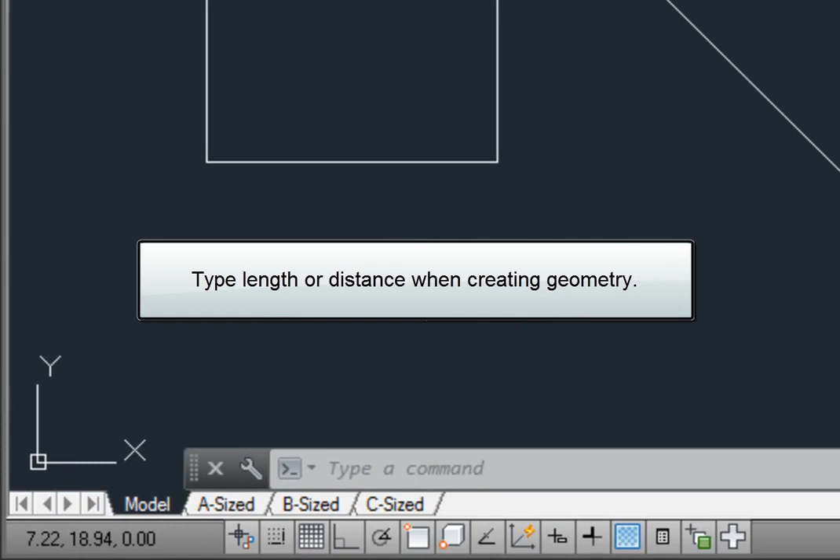Direct distance entry is a simple but powerful technique that enables you to simply type a length or distance when creating geometry. Before proceeding, notice that down here in the status bar, I have all of the various drawing aids turned off. Now I'll start the line command.

I'll move the cursor on the screen, click to specify the starting point for the line, and then move my cursor over to the right. If I know that I want this line segment to be exactly 7 units long, I can simply type the number 7. Notice that it appears here in the command window.

If I press the Enter key and then move the cursor, notice that I've just created a line exactly 7 units long, and the program is ready for me to create another line segment. I'll press Enter to end the command. The problem with the line segment I just created is that while it's 7 units long, I have no idea what angle it was drawn at.

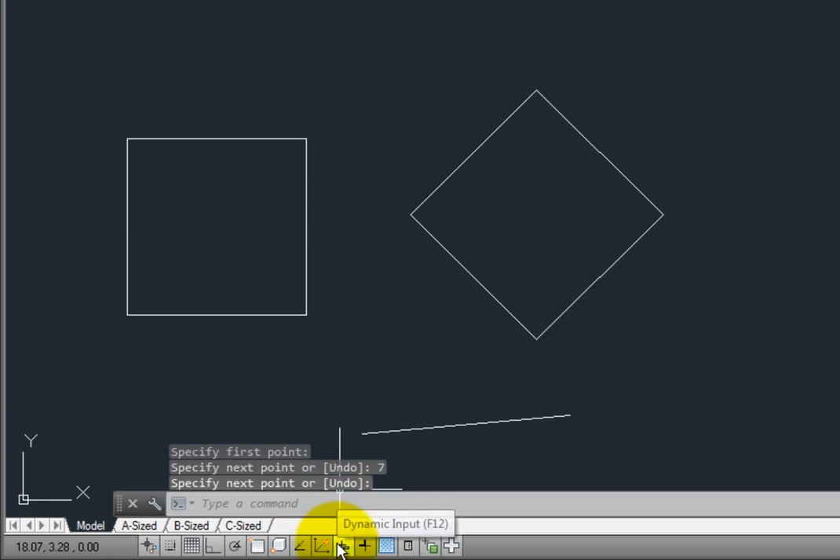So the first thing I'm going to do is to come back down on my status bar and toggle on Dynamic Input. Now with Dynamic Input turned on, let's create another line segment. I'll start the line command. Notice that as soon as I move my cursor into the drawing window, I can see the X and Y

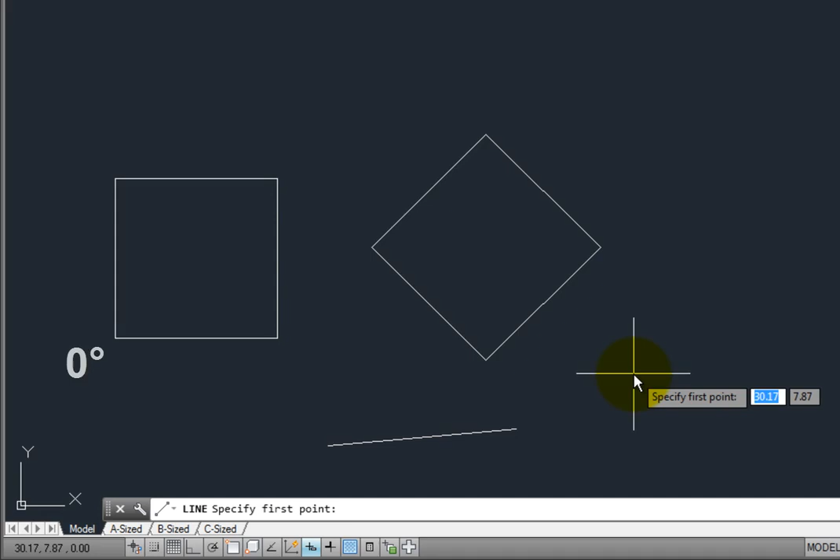coordinates of my cursor. What I want to do is to create a square, just like the one on the left. The length of each side of the square is 6 units long, which means that I'm going to need to draw line segments at an angle of 0, 90, 180, and 270 that are each exactly 6 units long.

If I know where I want the first line segment to start, I could type in that coordinate, but in this case, I'm just going to pick a point. Then I'll move the cursor to the right. Dynamic Input shows me the length of the line and the angle of the line, and I can toggle between those two fields by pressing the Tab key.

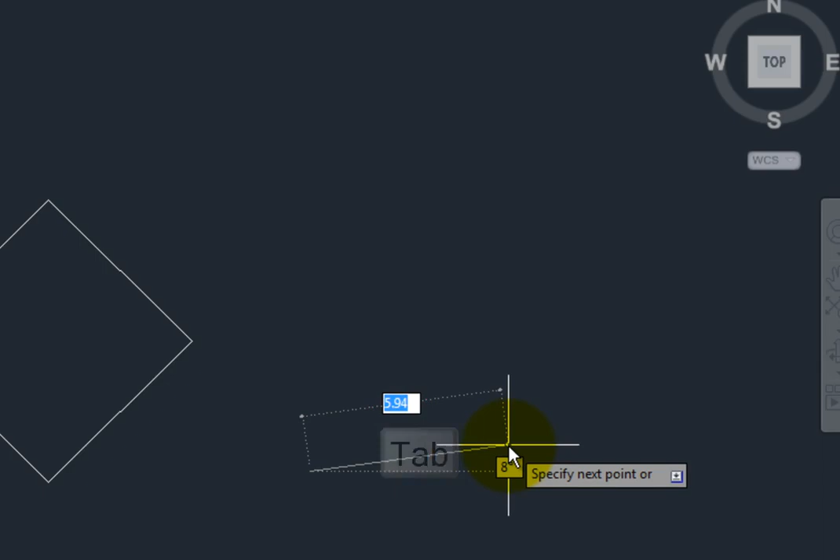So if I want to specify the length first, I can press Tab to make the length field active, then type 6, and then press the Tab key again to toggle to the angle value. The length of the line segment is now locked to 6 units, but notice that I can still vary the angle. Since I want this line to go straight out to the right, which is the 0 angle, I can type 0 and press the Tab key again.

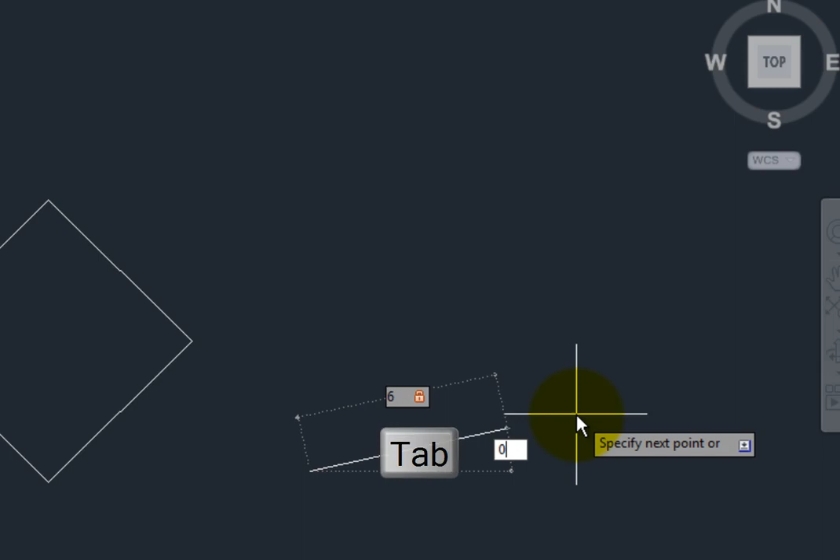Notice that now both the length and angle are locked. Regardless of where I move the cursor, the line segment doesn't change. It's locked to a length of 6 and an angle of 0. When I press the Enter key, the geometry is created. Now the program prompts me to specify the next point.

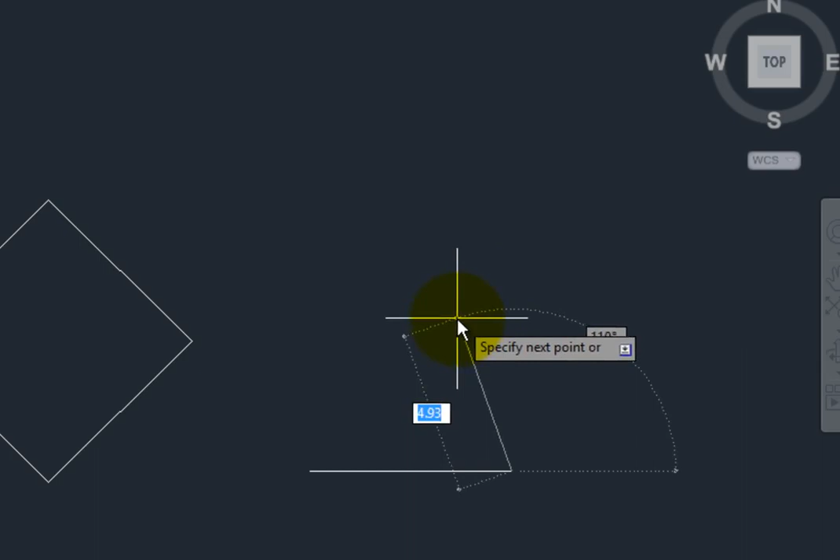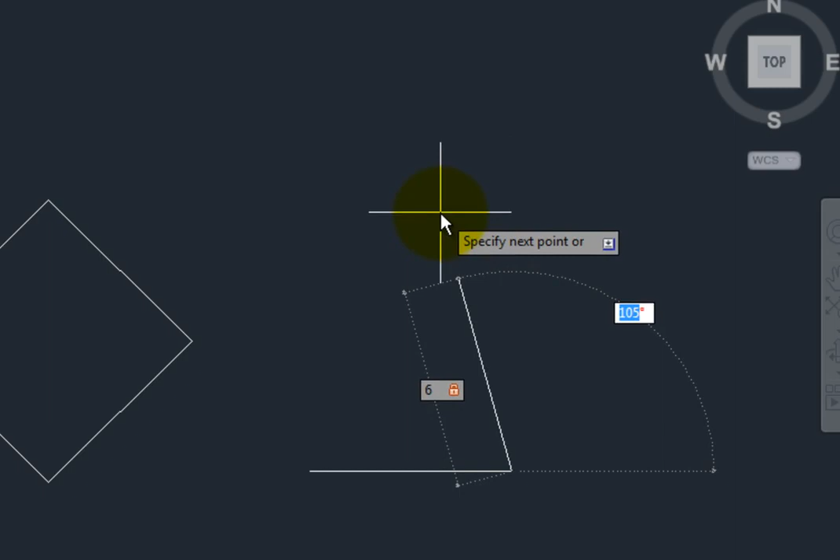Again, the Dynamic Input shows me the length and angle. If the distance field is active, I can type 6 and then press the Tab key to lock that value and switch to the angle field. The distance is locked to 6. Now I can type in the angle of 90 degrees and press the Tab key. That locks the line segment into the desired vertical location. When I press the Enter key, the program creates that line segment.

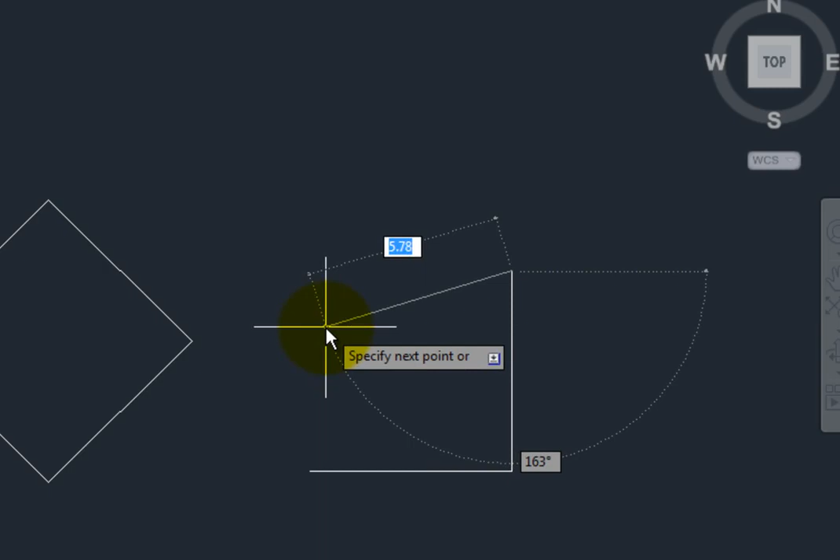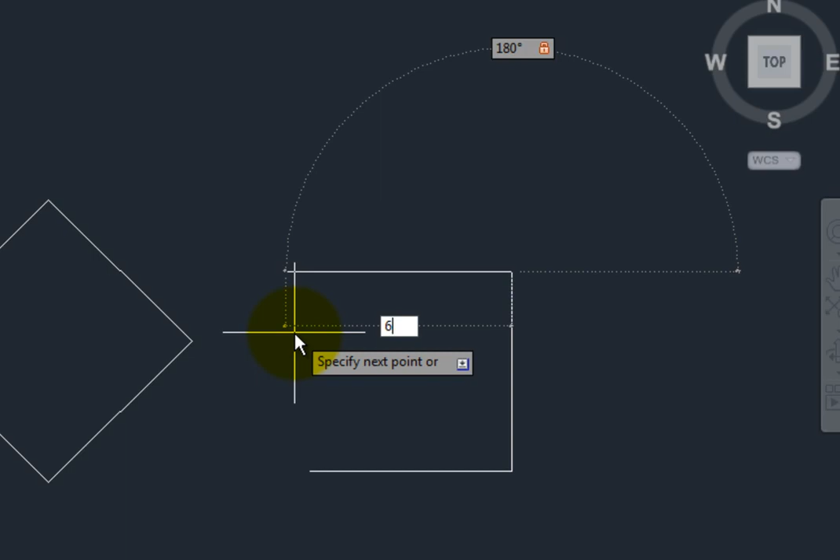This time, let's set the angle first. I'll press the Tab key to make the angle value active. I'll type an angle of 180 degrees and press the Tab key. Now my line is locked at the desired orientation, but I can still change its length. I'll type 6, and since I know that's the length I want, I can save a step. Instead of pressing the Tab key, I can just press the Enter key to create that line segment.

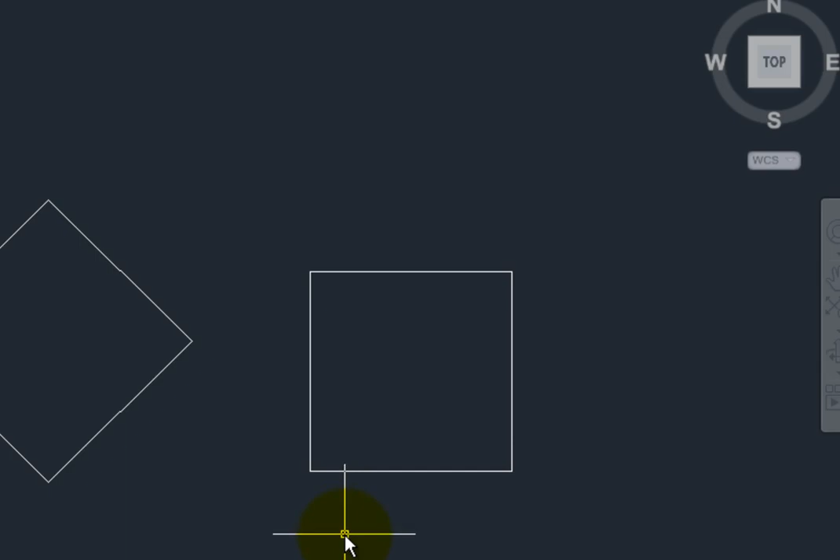To create the final side of the square, I'll simply right-click and choose the Close option to create the final side by drawing a line segment from the current point back to the starting point. So by using direct distance entry, typing the length of the line in conjunction with Dynamic Input, I can quickly draw accurate geometry.